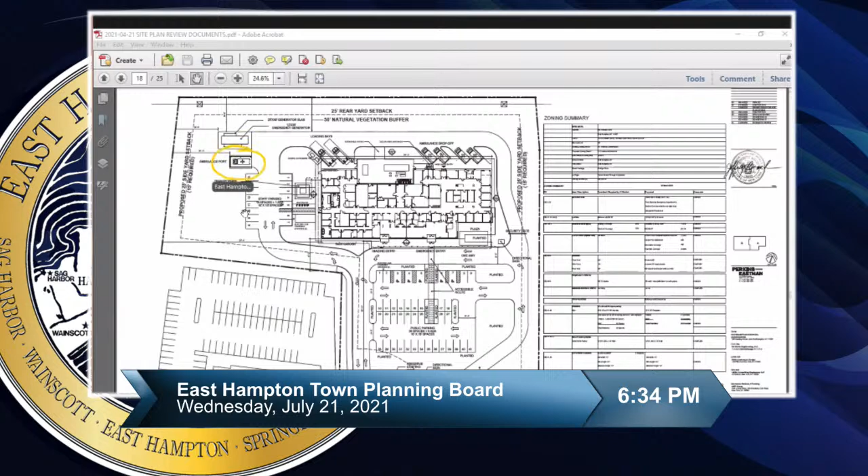They're also still proposing 2 truck spaces and 4 ambulance spaces. There was an ambulance garage that was supposed to be—and I will use our handy dandy high-tech feature here, if I can. Oh, not working. There we go. It was supposed to be up in this area here, which is proposed now just to be a regular carport, not a concealed garage.

So the board, at the time of the initial review, formed a consensus that the application should be referred to a consulting engineer. Since that time, again, the town board is lead agency. They have made a negative declaration. Among those findings is that there would be no significant adverse impact on traffic and circulation.

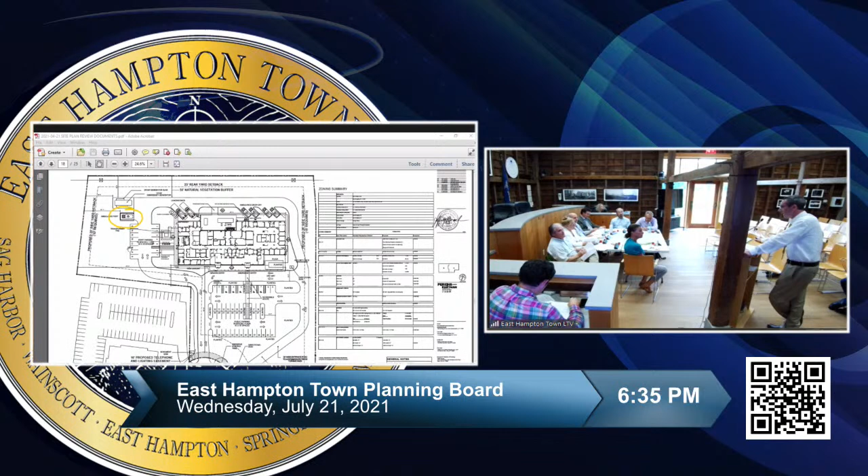There were actually 2 traffic studies done, an original one and then an amended one. The original traffic study, which found that there would not be a significant impact on Montauk Highway, was in regard to a building of 32,000 plus square feet. They've since reduced that to less than 22,000 square feet, which is almost a one-third reduction in size. The amount of generated vehicular trips in these traffic studies is based on the size of the building. So that document does seem to be even an overestimation of the traffic impacts you can anticipate from this project.

However, we do reiterate to you that it was a strong consensus of the planning board to request that an outside consulting engineer review this project for the planning board. However, you should consider the findings of the traffic study.

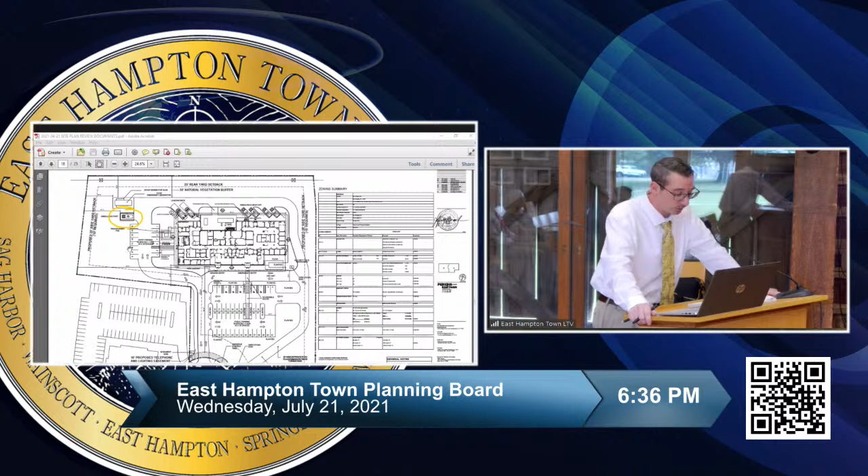Most importantly, the primary detriment would be an increasing time required for turning movements off of Pantigo Place onto Montauk Highway. We found that there would be little to no impact on through traffic. And it really is the sole discretion of the DOT as far as what would be put at this intersection, right here between Pantigo Place and Montauk Highway. They have recommended that a traffic light be installed. That is included in the traffic study.

But basically, I think if you did get a consulting engineer to look at this, their comments would be based on, or would be limited to, on-site circulation and the design of access. If I can maybe scroll down here, this will help a little bit.

The circle at the end of Pantigo Place is still proposed to remain.

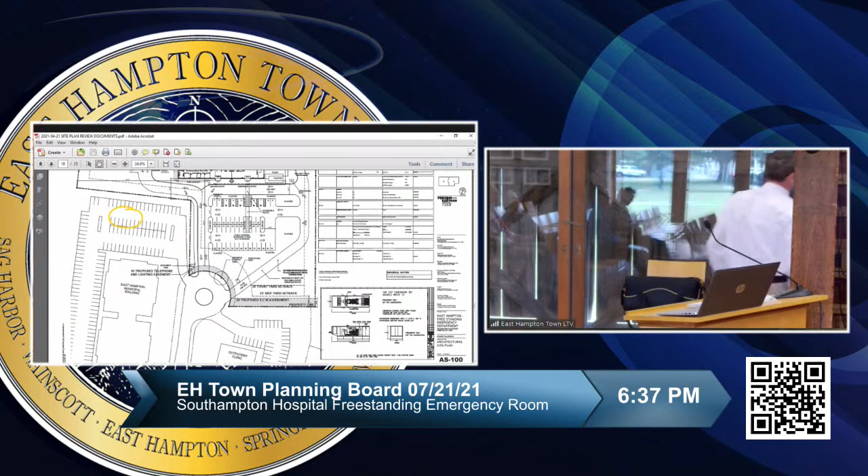The main entrance would be a two-way traffic pattern through here. This would be a one-way traffic pattern for the ambulances to the back of the property, cutting through and coming all the way up behind the building. This would be the main entrance into the parking lot, and then there would be two-way traffic throughout.

The rear area of the site would be limited to ambulance traffic and employees. I think at this point that's probably the most you'd get from a consulting engineer as far as creating traffic and circulation issues, but that is something the board certainly raised at the initial review, and you should have that discussion again.

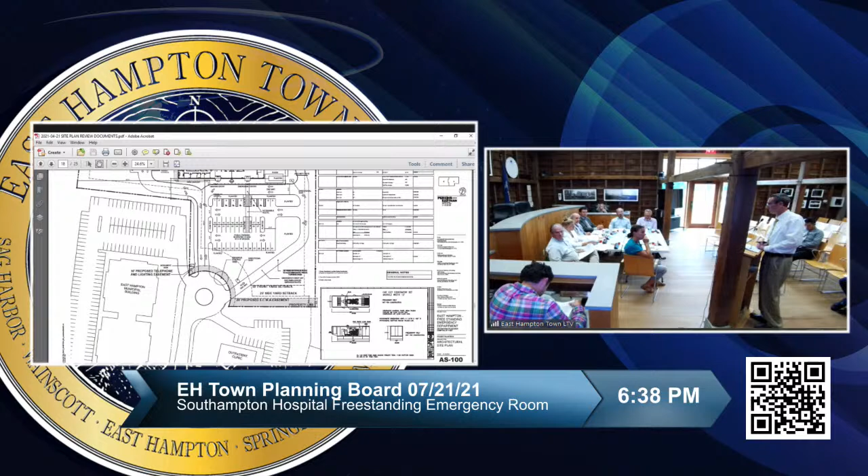Another thing the board wanted a consulting engineer to look at during the initial review was grading and drainage. The applicants have submitted a comprehensive site grading and drainage plan. I'm sure you're all familiar with the site - it is about as flat as a property can get. There are no wetlands or unique natural features that would have any significant impact on the need for special drainage control structures. They've submitted a grading and drainage plan with spot elevations, both existing and proposed, stamped by a licensed professional. I don't feel you need additional information, but you should have that discussion.

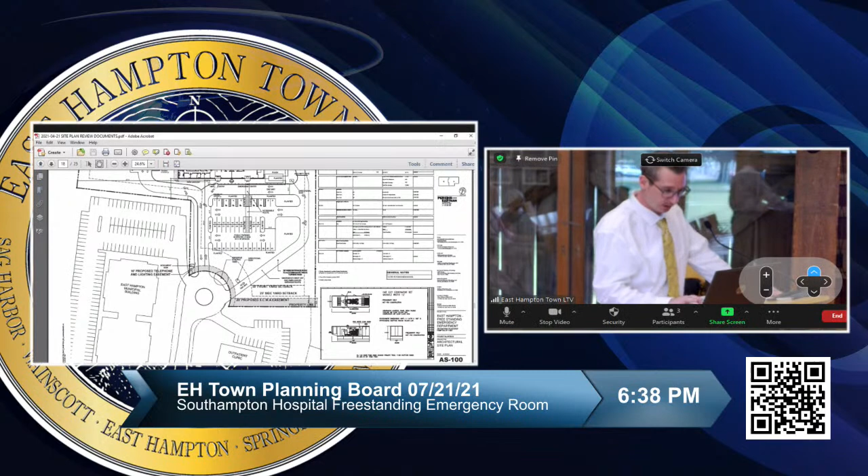It came up during the initial review and was a big point of interest when the town board was discussing this. Before we even got to the town board, I discussed this with the applicants - this area of town, which I'll zoom in on and highlight for you.

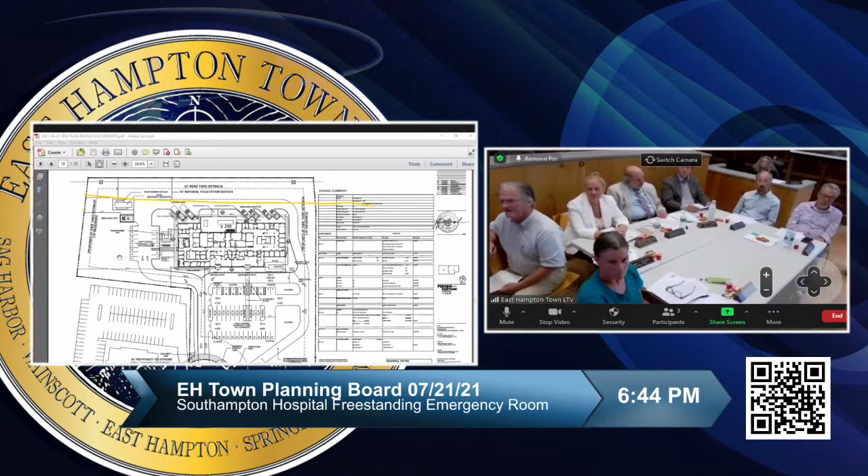However, we also note that they are proposing the generator right here, which is 50 feet away from that northern property line. And again, that northern property line is train tracks. You have to go another 75 feet, I believe, on the other side of that to get to a residential boundary. And that's actually a protected, although residentially zoned, it's a CPF-purchased town-owned lot. But the board should discuss the potential for noise from the generator.

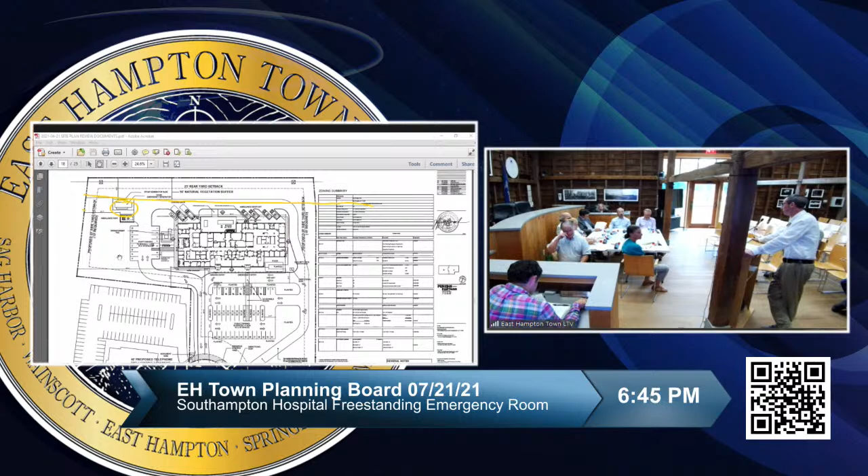Another aspect of the generator you might want to discuss is, again, this is proposed as a diesel generator. It's been recommended that where generators are required, especially with personal wireless service facilities, that the applicants consider using propane. This completely eliminates the potential for leaks as a non-liquid fuel source. They're proposing this on a concrete pad, as you can kind of see illustrated there. But that is something that should be considered, and you should discuss the potential for that with the applicants.

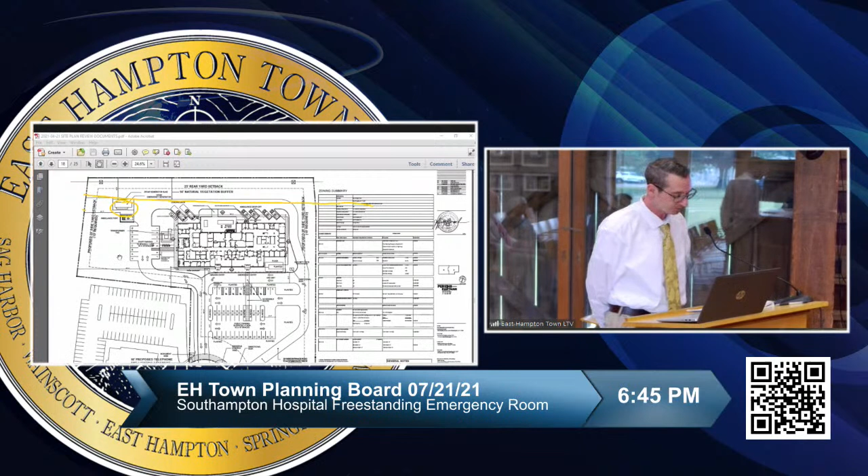The fire marshal has signed off on this and has checked it for compliance with the Americans with Disabilities Act. The Architectural Review Board has reviewed this, I believe, twice. They stated that they had no comments at the time that they last reviewed it, although that was September of last year. The applicants have submitted a comprehensive site lighting plan as well as a site landscaping plan.

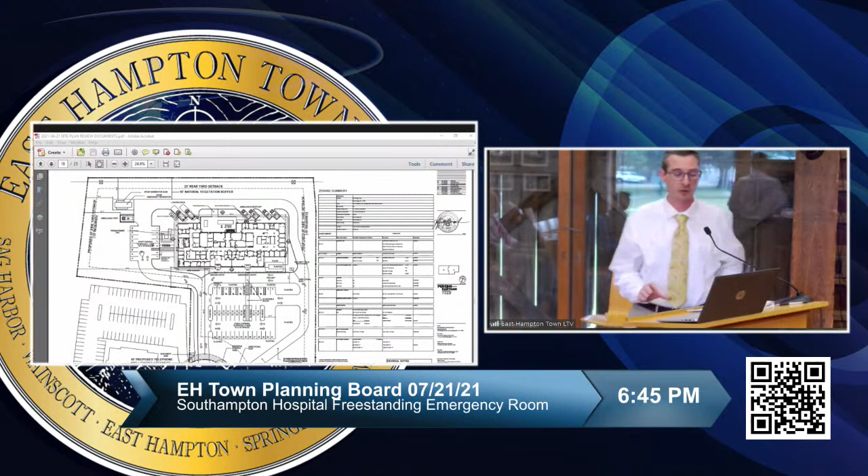The lighting plan conforms with all requirements of the town code. The planning department had outlined a number of elements of the previous plan that were non-compliant. They have corrected those.

So yeah, that I actually want to come back to, which is the floor plan. But I wanted to get to the landscaping plan. There we go.

So that is their site landscaping plan. It's mostly unchanged from what you saw at the initial review. They do propose to leave areas of existing vegetation around the periphery. However, it's a very nice mix of trees and low-lying shrubs in the interior of the site. We have no objection to it, but the planning board should review it.

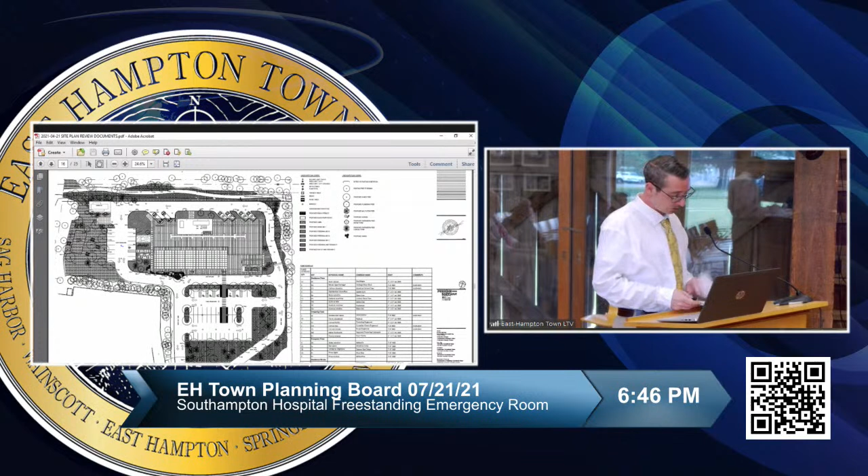Other than that, those are the issues that really need to be addressed. The application is technically incomplete at this time. However, once you do address all of those issues, it will be ready to be scheduled for a public hearing.

Again, just as a summary, you should discuss the nature of the operation and decide if you need a narrative or any further documentation from the applicants. You should discuss whether or not the reduced amount of parking, which is still above what's required by the code, is acceptable. You should determine whether or not you still feel you need an outside engineer or any additional information with regard to traffic or drainage control. And you should consult the issue of the 50-foot buffer with counsel and discuss the issues I just mentioned about the generator. So.

Very, very thorough. Thank you. It requires thoroughness. Thanks for giving it. Did you want to address?

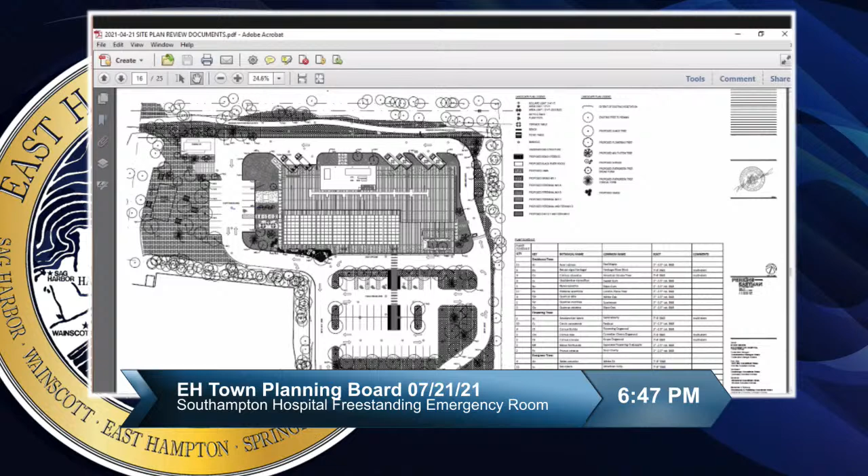Before you go, Thomas, let me talk about that covenant. Liz, John, Janicki and I had a long discussion about it. Long story short, we feel the covenant doesn't apply to this particular use on this particular lot, because the covenant is for residential improvements and residential lots, and this is neither. So I can put that in a memo to the file to make a record, but that's it.

Good evening, board members. Liz Vale, Brown Fritz, 50 Station Road, Water Mill, New York, on behalf of the applicant, Southampton Hospital Association, for the proposed emergency room department at 400 Pantigo Place. I'm here tonight with our engineer, Robert DeBruin of DeBruin Engineering, and our architect, Joanne Violenti of Perkins Eastman. As the board is aware, we obtained a zone change for the subject property from the town board, changing the zoning from parks and conservation to commercial industrial. The proposal is for a semi-public facility in the CI zoning district. Our structure meets all zoning requirements for CI and will not require any variances in connection with the project.

We recently amended our application to reduce the proposed building from 23,830 square feet to 21,962 square feet, reducing the proposed lot coverage from 53% to 50%, eliminating the helistop or helipad from the plan, and reducing the parking based on the reduced square footage of the building. We have submitted a traffic study, an updated traffic study, an archaeological study, fully engineered site plans, lighting plans, and landscaping plans for the board's consideration.

The Town Board of the Town of East Hampton, as lead agency on the project, conducted a coordinated review and adopted a negative declaration by resolution number 2020-8-859, adopted on September 15th, 2020. Essentially, the nature of our application is intended to address the health, safety, and welfare of the people of the Town of East Hampton by providing emergent medical care in a closer location than Southampton Hospital. This is a proposed emergency room that will be run by the State of New York, SUNY Stony Brook Hospital. It will be open 24 hours, 7 days a week, as a 911 receiving site, regulated by New York State Public Health Law, Article 28.

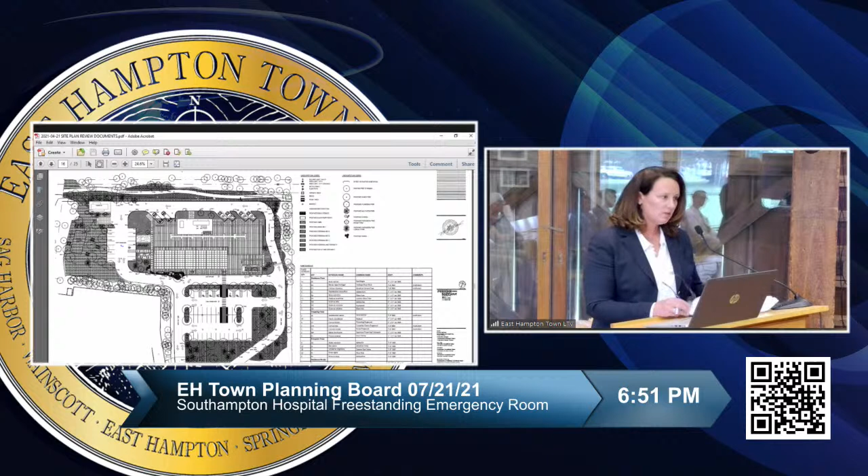Hi, good evening. I'm Joanne Violenti, and I just want to say that Eric did a wonderful job explaining the project, so I don't have too much to say. We have reduced the number of parking spaces from 72 to 56, which was really a function of reducing the number of seats in the waiting area, because we took some functions out of the building that allowed us to do that.

As you can see from the site plan, the public parking is on the lower portion of the site, with the ADA spaces above that. There's a ring road serving the 4 ambulance berths in the back, as well as the service drive. There's an emergency generator on the western side of the site at the top, and below that a carport that would house the Southampton ambulance, which would take people from here to the hospital if needed. The 4 berths would be for typical EMS personnel servicing the facility.

The parking to the left has 15 spaces for staff members and a staff entrance. The building has a solar collector, which you see on the roof.

I think there's been very minimal changes to the interior since the last time we presented this. The 4 corners of the building are in the same spots. What we did do is take some of the mechanical equipment, which had been in a recessed well on the roof, and bring that down to grade in an enclosure in the back of the site, which you can see there.

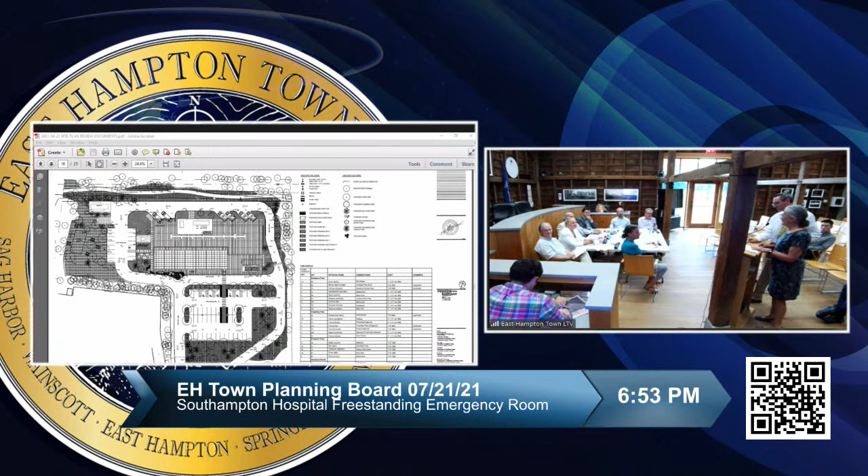So I guess the best way to do it is probably to... oops. If you just click through each one. Okay, and then you have to go. So this is the overall. Oh, you know what, I gotta stop screen sharing again. Sorry, harder technology here. Should stop and start again. Man, you should have it now. You should actually.

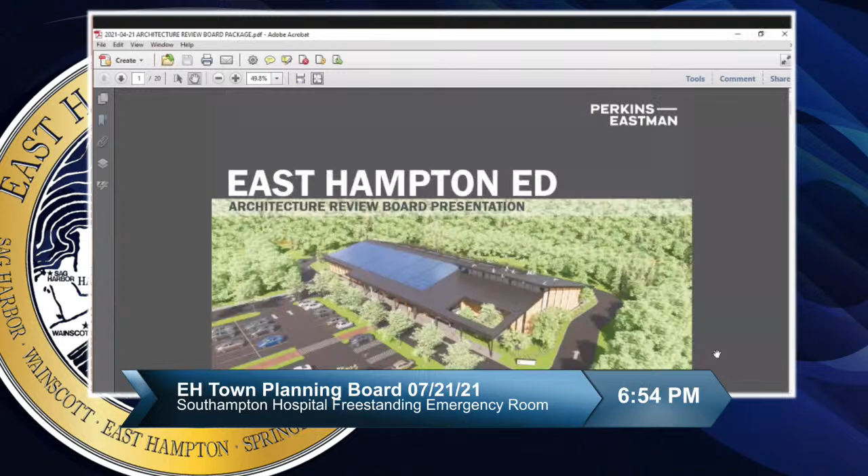Here we go. You could just click up and down and it'll go through each page. So clicking up and down, you can see the entrance off of Pantigo Road. Originally in the prior submission, we were modifying the circle, but now that we've reduced the parking and reconfigured the ring road access, we were able to eliminate that feature.

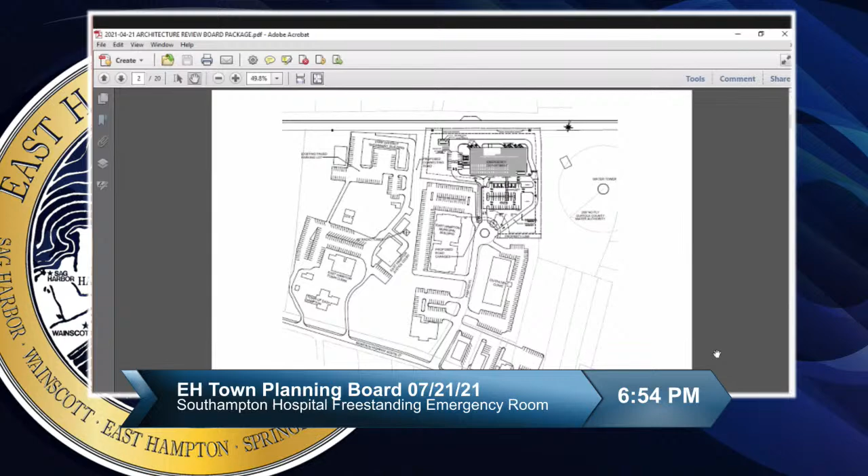As Eric mentioned, the site is very flat. It's cleared of landscaping. We are doing a major re-landscaping of the site, putting in over 135 trees, all native from the pine and oak forest that's indigenous to the area.

The building has, on the landscaping side... No, it's not a touch screen.

So on the landscaping side, in this area here, this is a rain garden. We tried to incorporate some natural features, so this is a rain garden here. There's the emergency entrance. Imaging is here, and those are the ambulance drop-off bays over there. Loading, the generator, and again the staff entrance to the side. There are some staff picnic areas and amenities like a volleyball court, informal on the lawn, just to give the staff some respite because they do work hard and long hours.

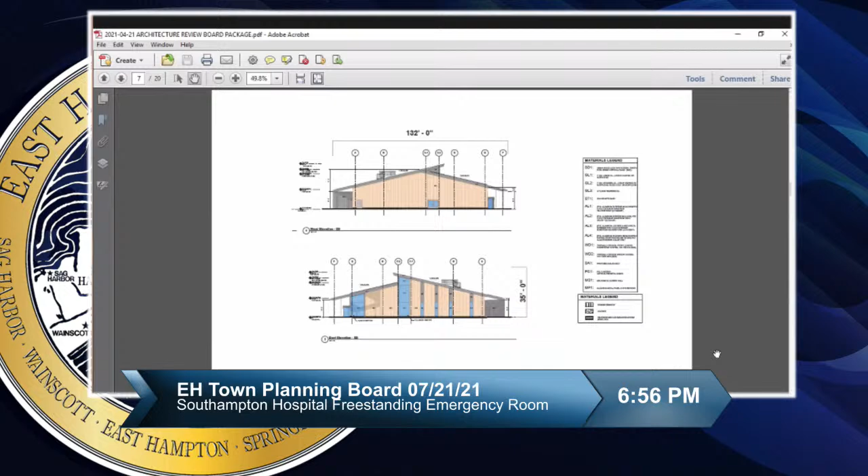These are just some sections through the property. Large truss structure. The building exterior is actually Trespa, I don't know if you know that material, but it looks like wood. It's a high pressure residence material, standing seam roof. The glazing on the building is all hurricane proof.

I think we have a stuck here. I froze, I guess. Okay, just give it a second. Went too fast, you too quick for it. All right, here, I'll get back for you. Sorry about that, we're still working out the kinks of... No, it's a great system.

Get to the color floor plan.

I'm just trying to jump on a couple of things here because it's actually not this computer, it's my computer back in the office. I'm remote connecting. Yeah, it just froze up.

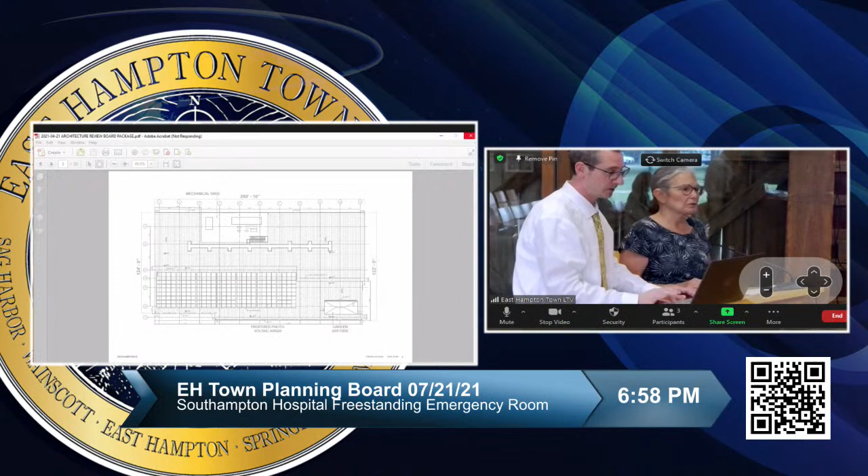Let me try and work on it. I don't know if you have any other questions, we briefly discussed the generator. I can answer some questions about that. It's a large generator, 800 kVA, so it's quite significant.

We did look into the idea of going with a propane generator for this type of facility. The Department of Health and CMS, the Centers for Medicare and Medicaid Services, require that it's a type 1 generator. That means there needs to be an uninterruptible fuel source, so that would either mean tanks on site, or we would need to get the propane authority to actually certify that the system will be able to be serviced throughout an emergency.

Sometimes lines are subject to breakage or flooding or something. Our engineers said they have not been successful with other gas authorities trying to get that kind of dispensation. But there are other considerations relative to diesel versus propane.

The diesel is noisier, but it's less expensive. The problem with propane is that given the size of our generator, we exceed the maximum size right now that propane generators can support. So there would have to be multiple generators, and they would be larger, giving it a much larger footprint on the site if we had to go that route.

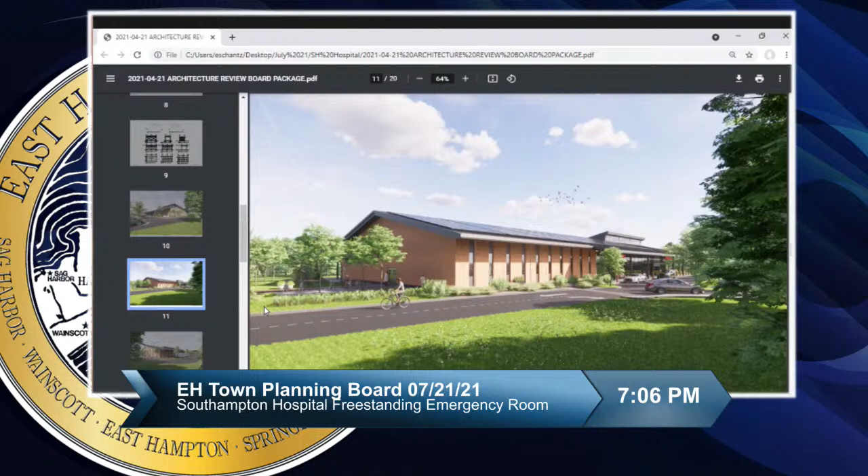Next one, sure. And then this is a view of the back. This is the walkway, which is a little over-detailed with the railing, but you can see the four ambulance bays, and beyond that would be the carport. The service drive is tucked away.

All of the trash holding. Can you get to the plan? You can just take a quick look at the floor plan.

Yeah, that might be a little... or maybe might as well do 15 while we're looking at. Okay, and then this is that covered colonnade area with the picnic area. People waiting for loved ones inside can come outside and get a little fresh air, make a phone call, whatnot.

I think I can get to the floor plan, but you got to give me about 30 seconds. Okay, just want to take you briefly through the plan. All the trash holding and everything is within the building. We've got facilities for the medical waste and the outgoing linens and things like that, all contained within the structure.

The floor plan with the breakdown of the rooms, is that what you're looking for? Yeah, just the color floor plan. Oh, was it in the ARB submission? Should be, yeah. Oh okay, I thought you wanted me to do separate plans. My apologies, it's just a little easier to read because of the color.

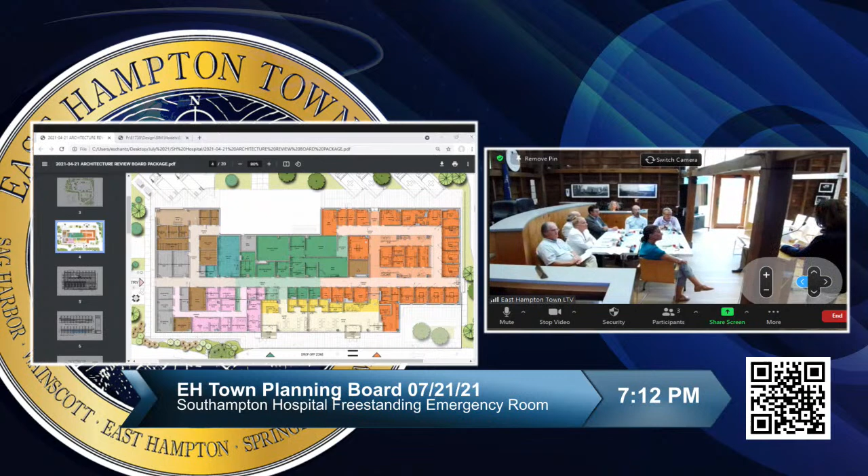This might be a question for Liz — why was the helipad eliminated? I'm just curious about that. Because it's actually off-site, so that was proposed off-site, and we didn't have control or authority off of — it's on town property here. So it was not something — the town's actually been revamping a lot of the town campus as well, so that was not contemplated in their plan. And emergency helicopters can actually land anywhere it's safe. So we determined based on all of those factors that we could still have access to a helicopter when necessary. Okay, and we wouldn't be losing that feature just because we weren't establishing it on someone else's property. Got it, okay.

And we turn to the committee member. Ian? Yeah, I have — thank you for the presentation. Thank you, Eric, thank you applicants. It looks like a beautiful building, but I guess I'll leave that to the ARB to decide.

I frankly have mixed feelings about this application. I was one of the board members who wasn't ready to recommend the zone change because I just didn't feel that I had enough information at that time. And frankly, I'm still not sure that this is the right place for this project in town. However, I think our role here as a planning board is somewhat limited, and you've gotten the zone change, so if it's CI, I want to look at it just based on our standards. And I think that frankly, you meet them.

I do have some concerns still. The first one is traffic. I guess I got a question for Eric — I'm sorry I didn't ask you this earlier, we did speak about the project, but what was the delay in the turning from Pantigo Place? I didn't mean to put you on the spot, I feel bad. I could probably tell you within a couple of minutes. Okay, or we can revisit it.